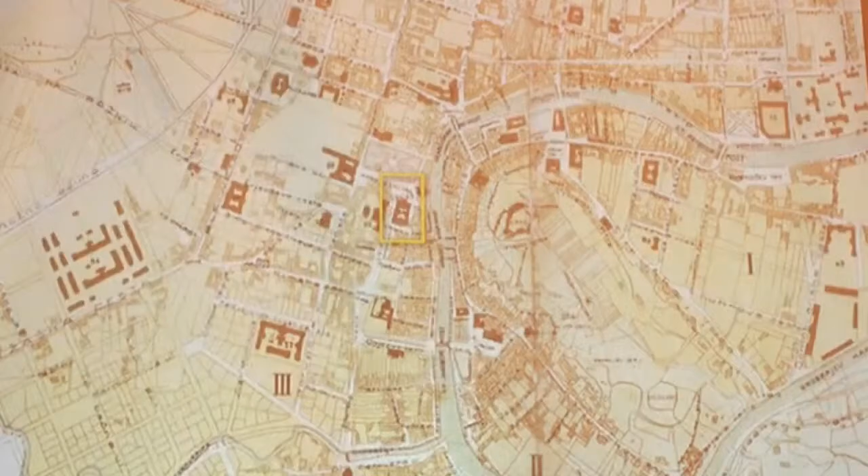A little bit of history before we start. I'd like to present the site where this building was built and what was there before. Before this building was built, here stood the so-called Vicedom's Palace, also called the princely seat or castle, as the ruler stayed there when visiting Ljubljana.

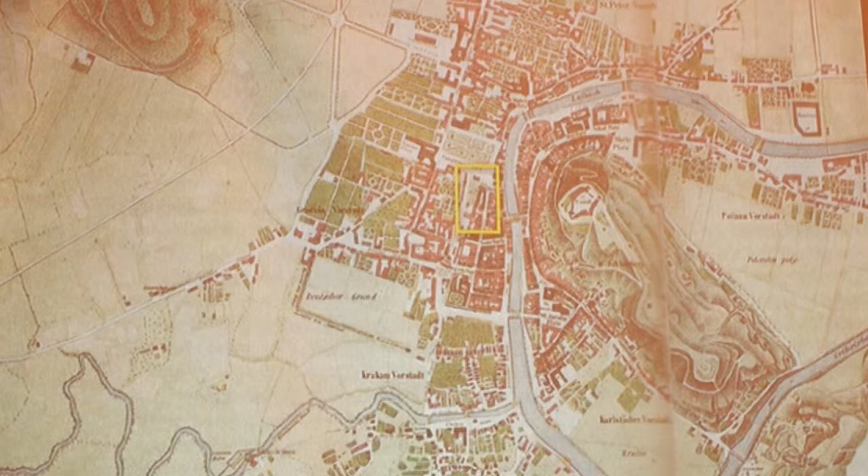In the past, this corner was protected by a fortified camp facing Congress Square, here. It was quite an important site, so fortified, that a lot of important residents and nobility were building their palaces and mansions here. This is also why this area is still named Square of the Princely Seat, and was mainly inhabited by the nobility.

In 1895, there was an earthquake in Ljubljana, so the Vicedom's Palace was demolished, and this building in which we are today was built between 1899 and 1902 by architect Hráský and later Josip Hudec. You can see the plan of the building on this map.

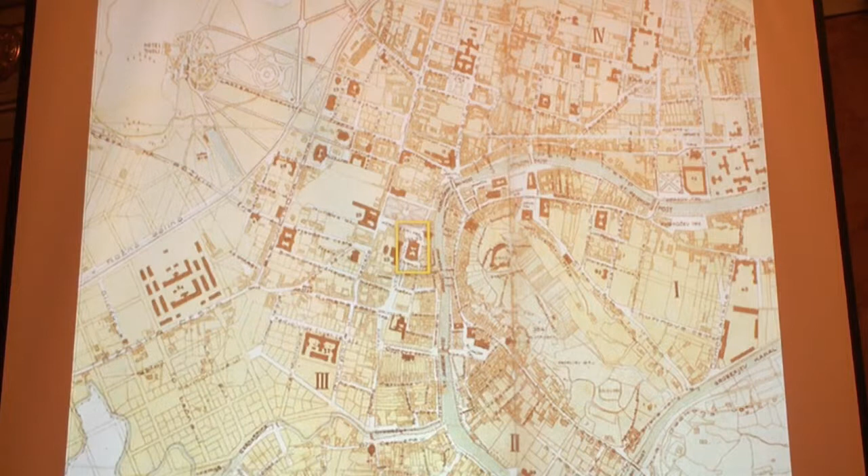The new Vice Lord's Mansion was built in a German Renaissance style, and its architecture is emphasized by little columns and adorned with the coats of arms of 14 Carniolan towns. At the center of the front, there is also the coat of arms of the province of Carniola, held up with two children. I don't know how much you can see that.

The building became the Slovene alma mater when the university was established in 1919. Before the Second World War, the university also achieved complete independence. On the green plot in front of the building, you can still see today a bronze herm of its first rector, mathematician Josip Plemelj, to celebrate 50 years of the university.

At first, the university building housed the lecture rooms of some of the faculties, predominantly law and arts. Later on, only the law school with its institutes. And in the building, there is the seat of the rector's office and the university administration.

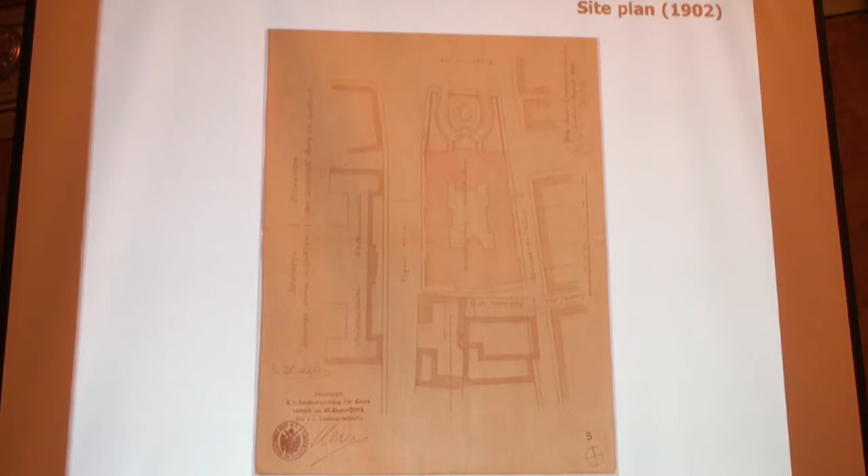This is the original plan. The building is situated on the extension of the building set along Vegova and Gosposka Street, and in transition to the Congress Square. On the second and third floor of the back wing is the festival hall, in which the Carniolan Provincial Assembly assembled until 1918.

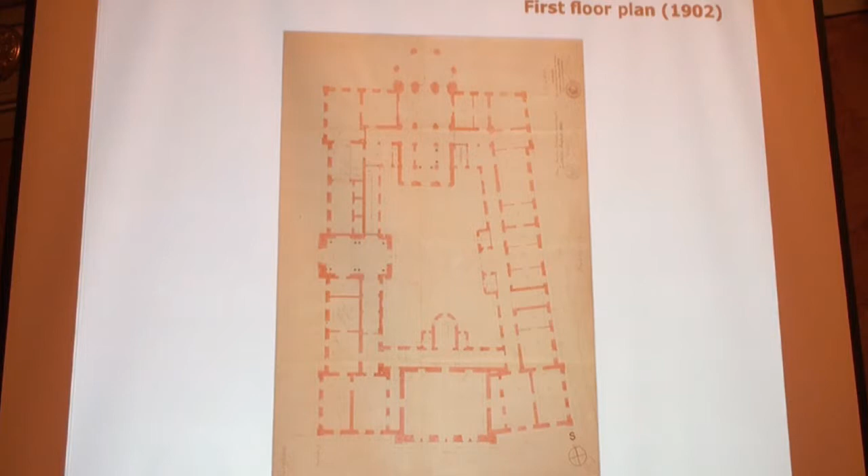The cross-section of the building shows a several-floor building with basement and attic, as well as a spacious inner court. The whole building and its individual parts are protected as a cultural monument of exceptional value. Among the most important heritage values are its spatial position in the urban part of the city, which I explained, and also the architectural value of the interior and exterior.

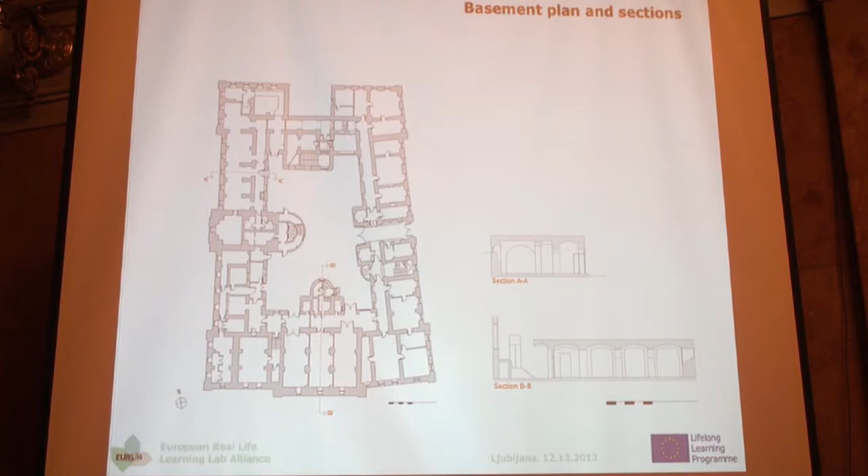So I would ask Tadej now to show his work. I will show you a quick look at the building. The building has 5 functional floors from basement to attic, each approximately 2,100 square meters. Now here is the first floor.

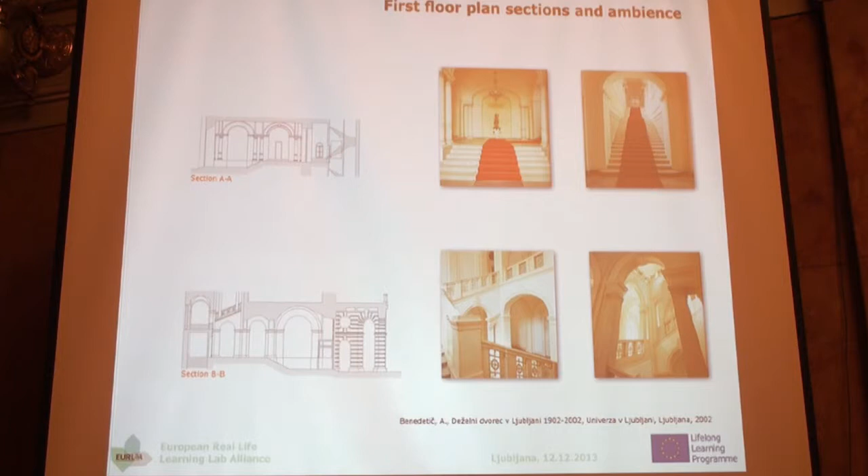Here are the main, the most prominent rooms on the first floor: the ceremonial entrance and staircase, and the main staircase on the first floor. Then we have the second floor plan.

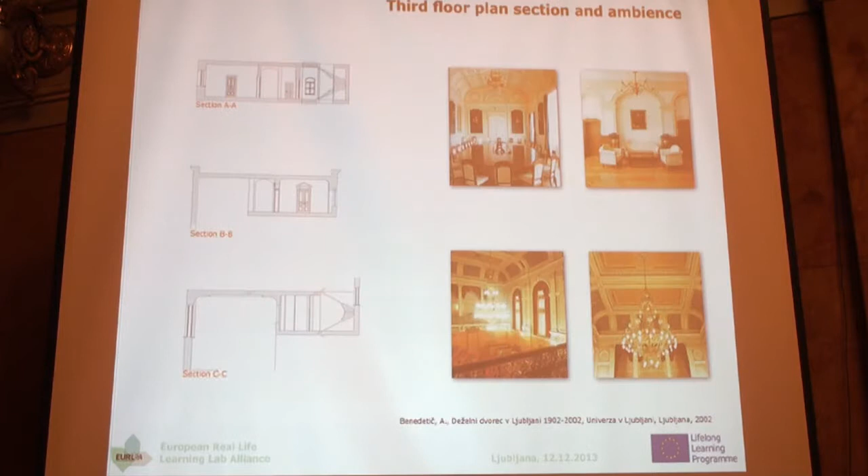Third floor plan. And attic. This was the quick look through plans.

Now the program of the building: in the basement there are rooms such as storage, installations, and archive, found in the first floor. The main and ceremonial staircase represent the most important interior, as I mentioned. The main staircase connects all floors of the building except the attic, while the ceremonial staircase is used only for special occasions and only connects ceremonial halls with the ceremonial entrance.

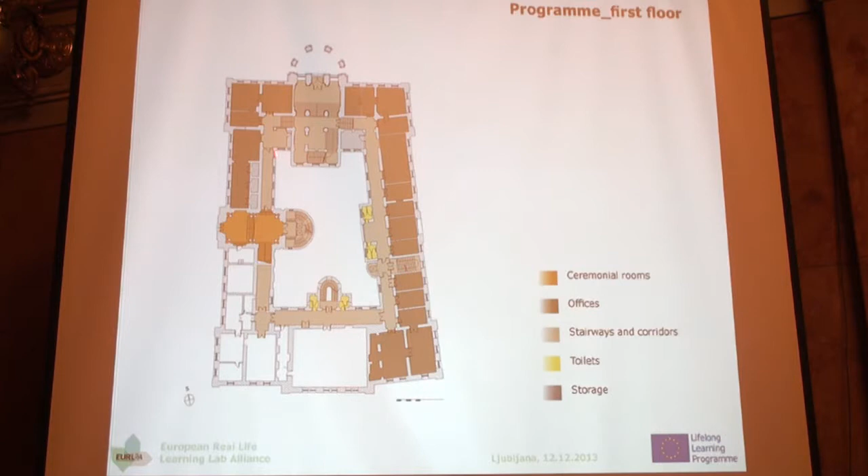So in the plan, here are the ceremonial entrance and stairs, and here is the main stairs. Then the second floor, called Piano Nobile, is the most prominent floor in terms of the program and the building decorations.

There are protocol areas for ceremonial events, the rector's room, and office rooms. It has to be mentioned that the assembly hall, where we are now, is, in addition to the staircase and lobby, the only room extending through two floors.

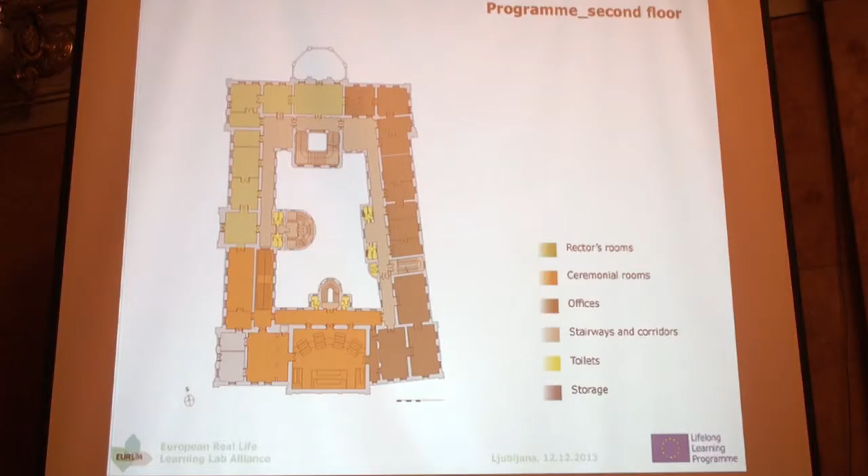Access to the attic was built subsequently - the tower in the atrium. This is a new part of the building. The entire area is not in use yet, only the part where the IRI Institute is, the part above the ceremonial entrance, and two rooms on the east side.

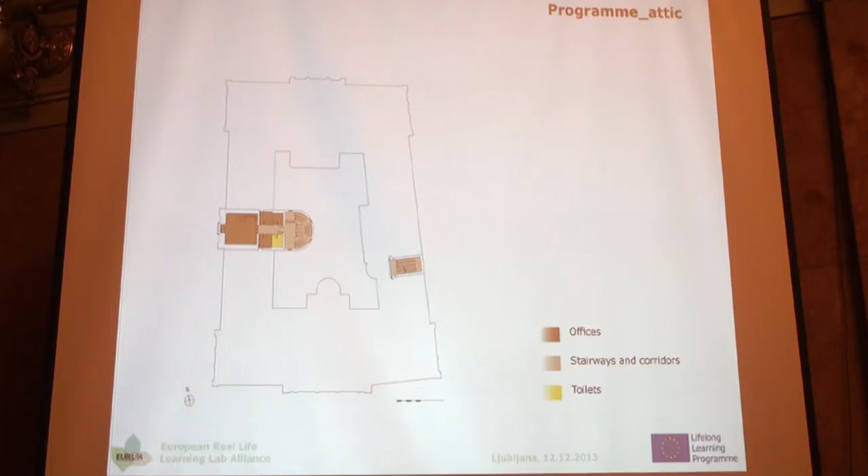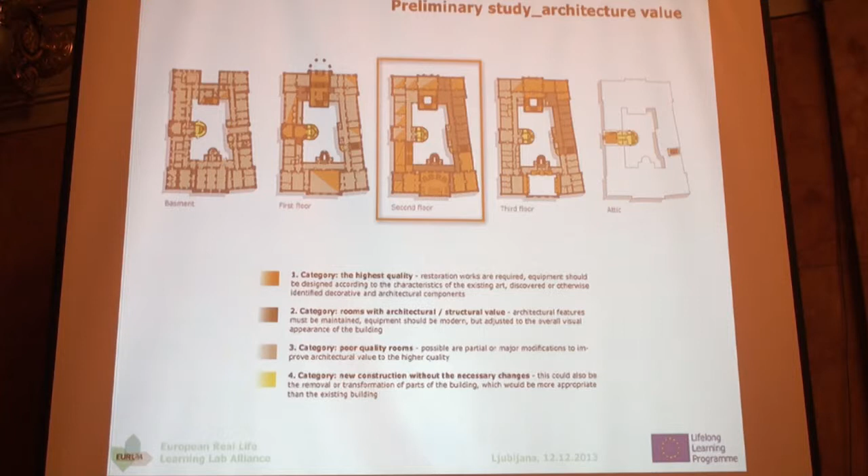During the preparation of the renovation plans around year 2000, a preliminary study of the building's architectural values before the renovation was done. Rooms were sorted into four categories of architectural value. The first category is the highest quality. Here is one closer example.

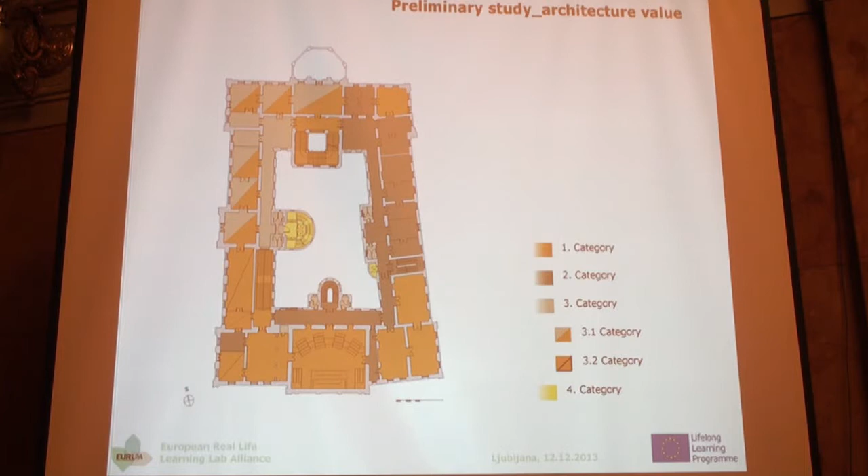The second category are rooms with architectural and structural value. The third category are poor quality rooms. There were some cases to modify rooms that were partly in the first category and partly in the third category, and the fourth category are new constructions without any necessary changes.

The rooms were recorded and categorized by a small graphic image and short description defining the area, size, purpose, elevation, and damage in each room of this building.

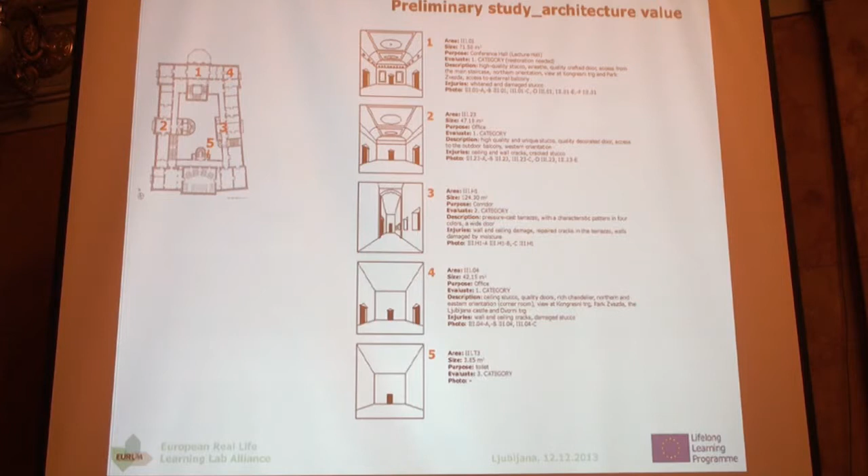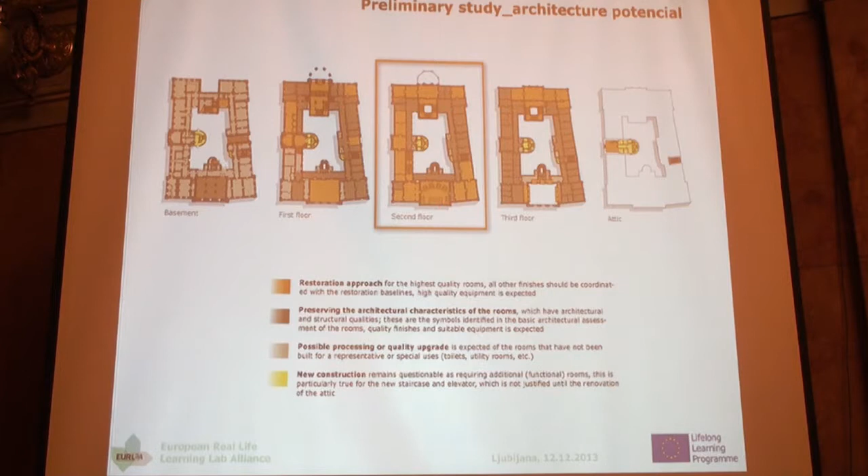Then the study of architectural potential was also sorted into categories, considering the quality which has to be reached after the renovation. Here is one shorter, closer look at this diagram. It shows how every floor should be refurbished.

Here are the same four categories as before: restoration approach for the highest quality rooms, then preserving the architectural characteristics of the room, possible processing or quality upgrade, and new construction. This study was made before the renovation.

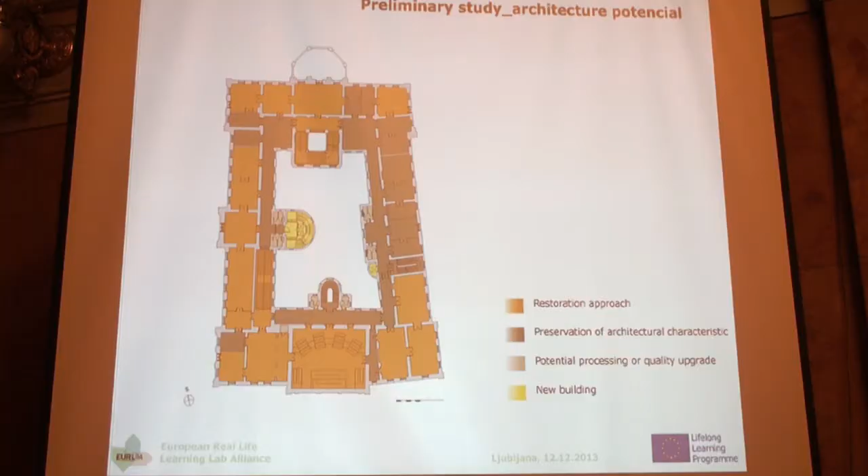So here I want to say something about the location. As mentioned, the building is located in the heart of the city.

The building is not part of a row of houses or a building island, but it stands on its own. What you see here are houses in a row. This building has streets, a park, and garden around it, so we can walk around it. That means all four facades of the building are equally decorated, though with different types of focuses.

The entrance area at the north side of the building represents a really important front of the Congress Square. This part. It is the only building facing the square whose construction line is moved back from the peripheral line of the square. All the other buildings here are built on this line, and only the rector's building is moved a little bit back.

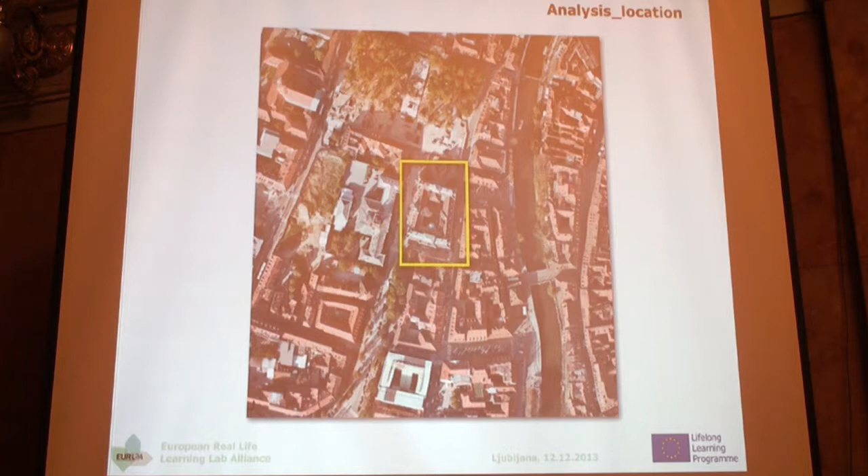The building has three types of entrances. The main entrance on the northern side is for visitors and employees. The entrance to the ceremonial room is located at the western side here of the building. The eastern access is also arranged for vehicles from the east side.

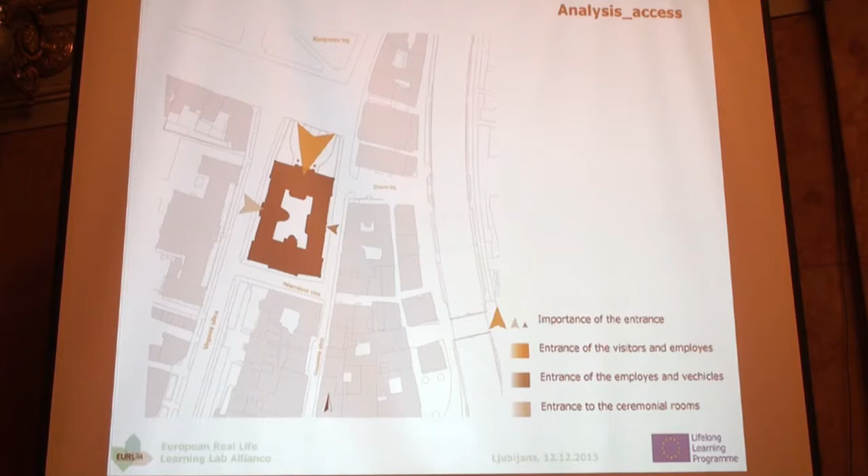The building volumes have different importance. The most prominent part of the building is the main entrance volume at the northern side and the part of the west facade. So this is the northern part, and this one is for ceremonial - it's like a tower on the west facade.

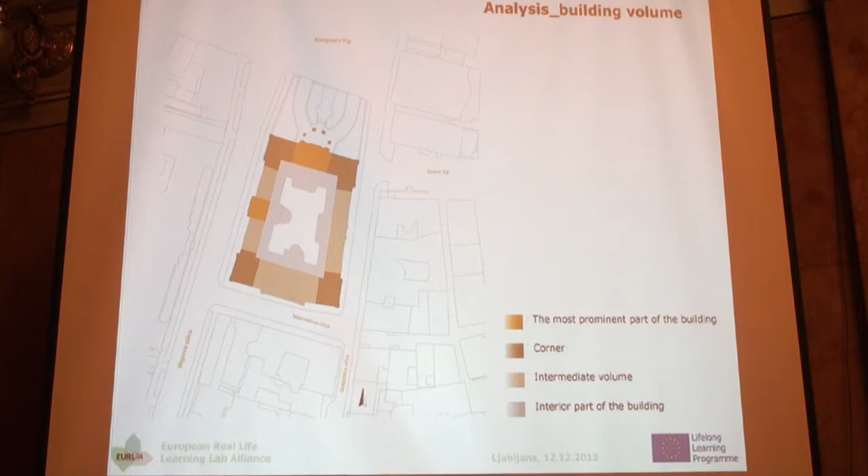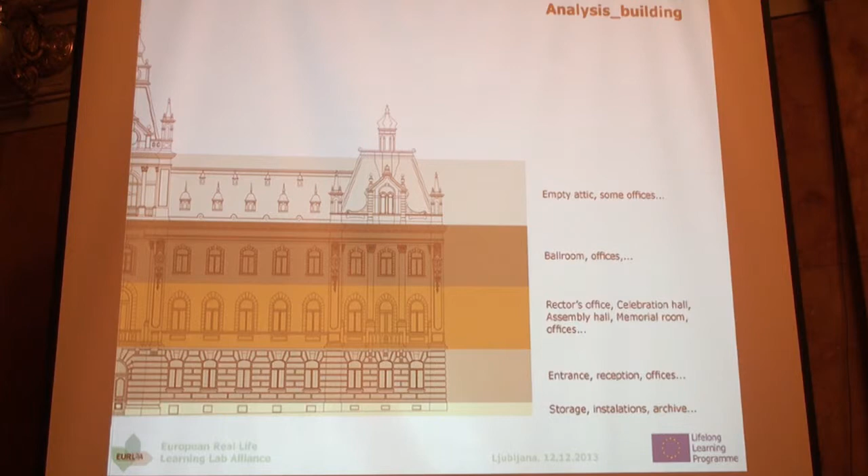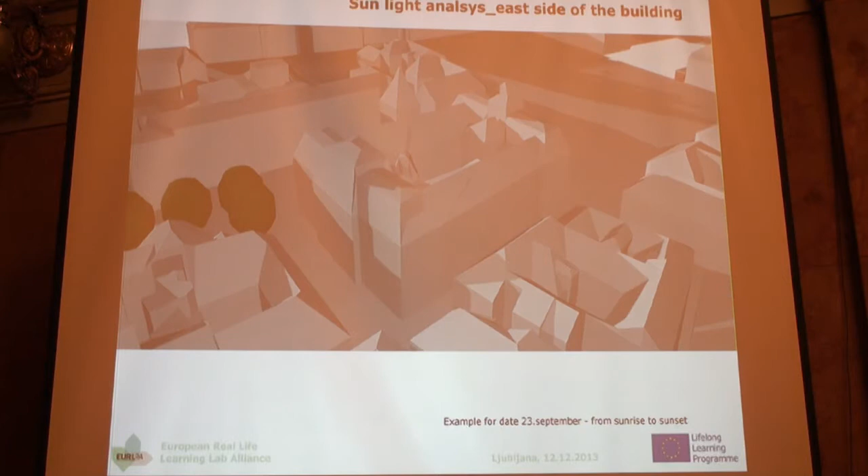The rooms in the building are arranged considering the importance of their functions, which can be observed also on the facades of the building. Here we make some sun study.

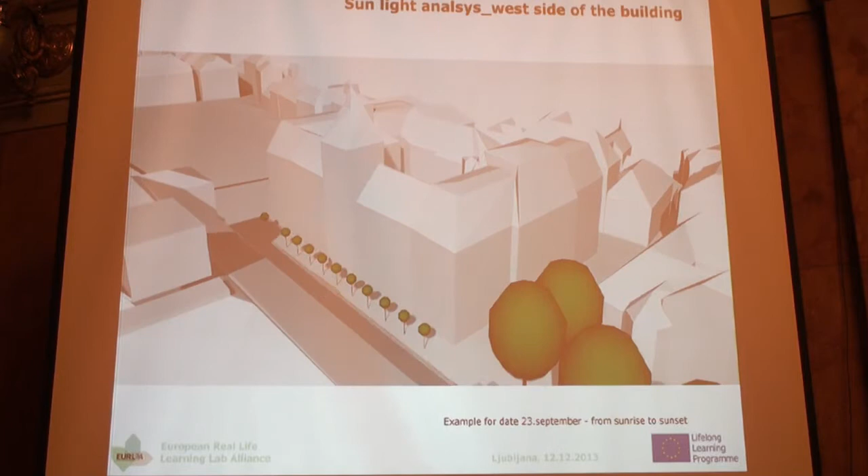This is just a graphic showing it. Later we will make a mathematical tool. So the external appearance of the building is connected with internal function.

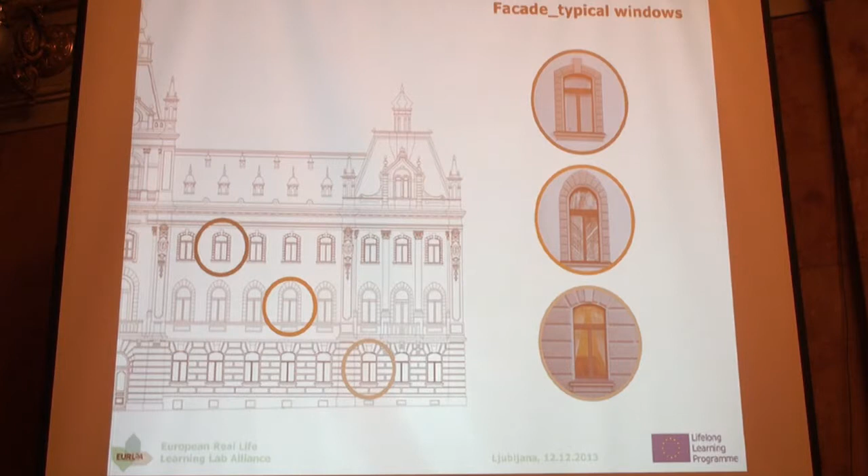Energy losses are high at windows and doors. There are 340 different windows, all of different types. Here are shown only the most typical ones on each floor.

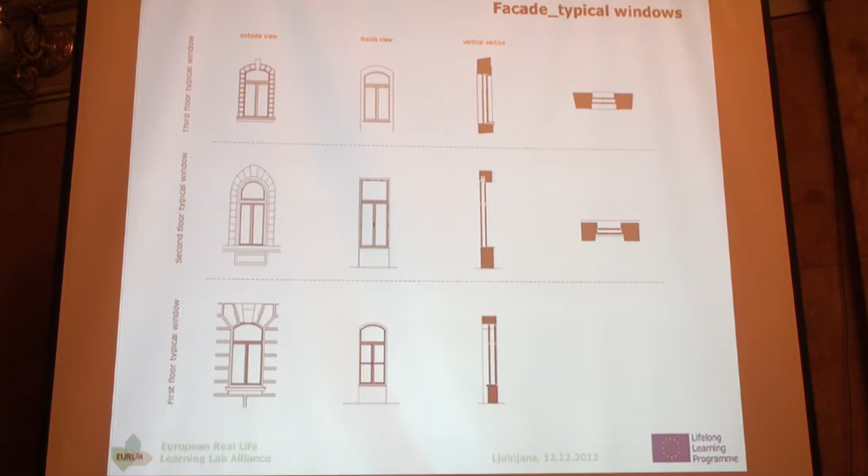So we have defined some problems which need to be faced if respecting the conditions of the Institute of Cultural Heritage and the energy refurbishment for the building. Existing windows are old and energy consuming. Those are box windows with single glazing. Then diverse forms of windows exist, as each floor has a different segment of the building.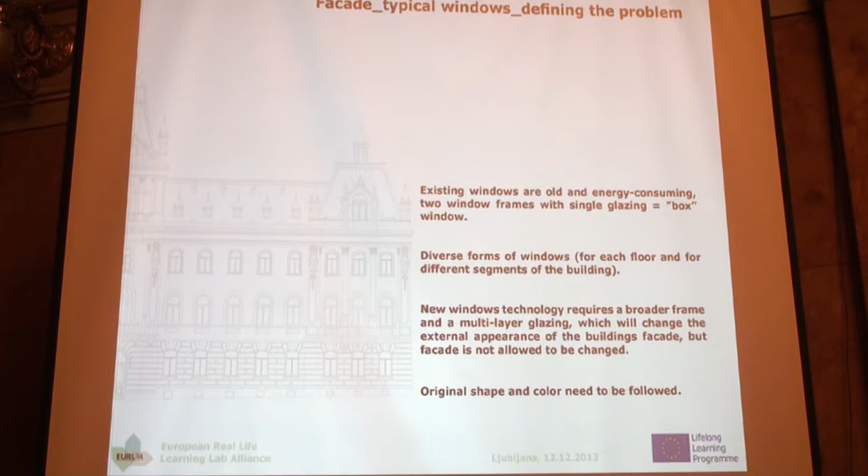The windows technology requires a broader frame and multi-layer glazing, which will change the external appearance of the building facade, but the facade is not allowed to be changed, and the original shape and colors of the windows and the building need to be followed.

I am Ale Sugosek. I'm coming from a company, Sora. We are a producer of wood and wood aluminium windows, and I guess I have quite a hard task now.

Because you're just after lunch, the temperature is just fine, the level of oxygen here is decreasing, and also the caffeine is not yet in your veins, but anyway, I will try to be as enthusiastic as possible.

So here we are in this Knowledge Alliance project, where we communicate and cooperate with a scientific institution, the Faculty of Architecture, and we are a kind of reality check. We try to give our best knowledge from industry, some of our former experiences, and also our knowledge from the field of thermal efficiency, and we try to mix this with theoretical background from the Faculty of Architecture together to get the best solution for this great building you are in today.

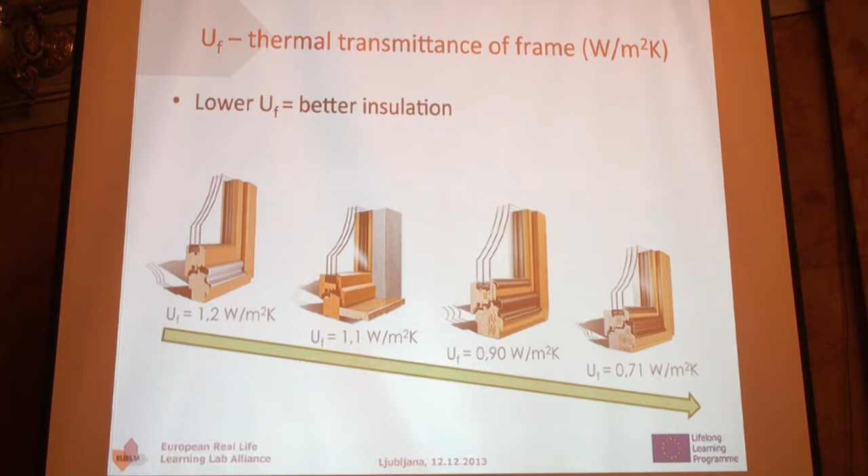Just quickly, a brief introduction about the windows. What is really important about the windows? The first thing is the thermal transmittance of the frame. As you can see here, this is the frame. So how much heat passes through the frame?

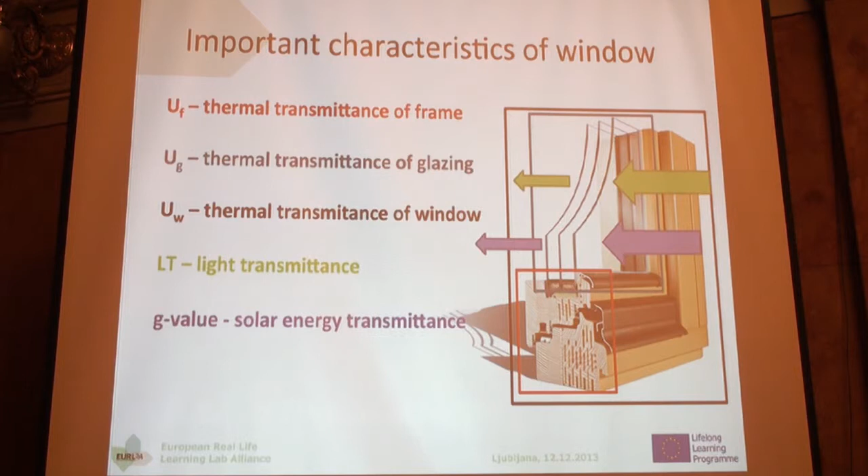The second one is the thermal transmittance of glazing - how much heat passes through the glass. The third thing is light transmittance of the glazing, or how much visible light passes through it. And the fourth thing is the so-called G value - how much solar energy passes through the glazing. These are the most important characteristics that we need to consider for this building.

So the lower the UF, or thermal transmittance of frame, is, the better insulation you have. And this is very important because you need to get close to some specific demands.

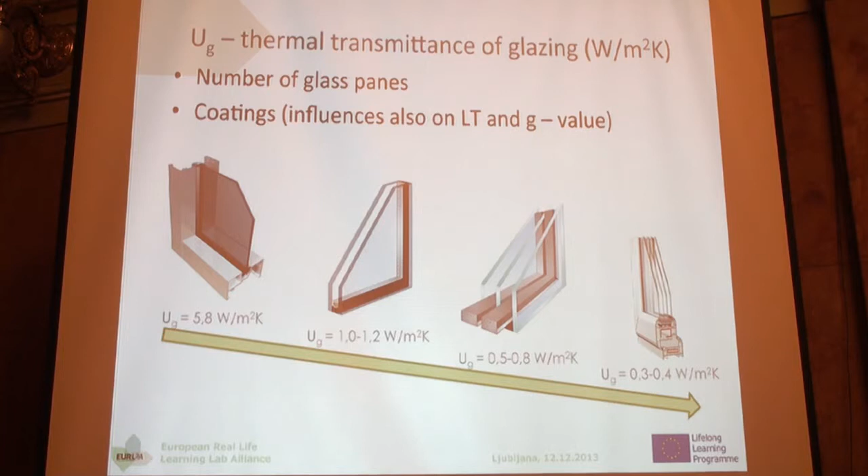Then further on we have thermal transmittance of glazing. We have double glazing, triple glazing, so the number of glass panes is very important. On this building, at this time, we have single glazing, as you can see here, and this is not really okay. Double glazing is getting more and more out of the industry, while triple glazing is getting more and more popular. The 4-pane glazing is not really okay because it is too heavy, and your windows and frame cannot gain such heavy glazing.

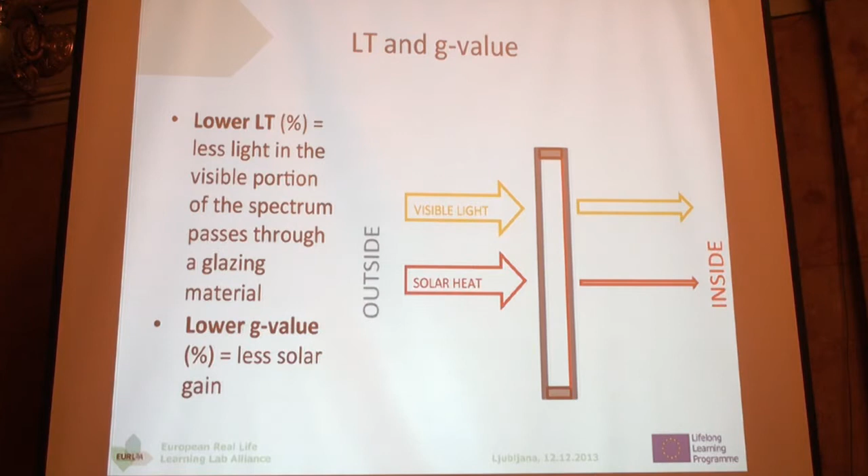And then we have light transmittance and the G value. The lower the light transmittance is, expressed as a percentage, the less visible light passes through the window, and it's quite the same with the G value - the lower that value is, the less solar energy passes through the window.

What do we have now on this building? Mostly we have so-called box windows - these have two casements, both of which can be opened, with single glazing. So the U-value, which is the combination of thermal transmittance of frame and glazing, for the entire window is around 3.5. This is a very high value, so these are not good windows.

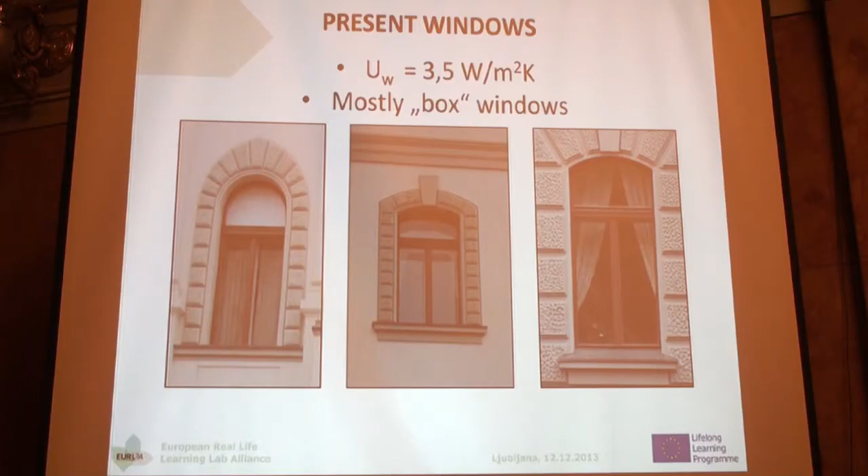And these here are demands. So from 3.5, we need to get as much as 1 watt per square meter Kelvin. And the second demand is the protection of cultural heritage. So the visual appearance must be quite the same, materials, and so on.

Based on these demands, we have some proposals from industry, what can be done, and the first proposal is, well, quite simple: a wooden window with triple glazing. Why triple glazing? Because with double glazing, you cannot reach the demand of that value 1.0. So you need triple glazing, and here the light transmittance of such glazing is around 70%, and the G value around 50%.

The second solution is box window. This will be in the case if the people from the Cultural Heritage Center say, no, box windows must stay the same, so we will do box windows. But we propose box windows with twice double glazing. And at the end, we have good thermal characteristics of the window. So these are two proposals.

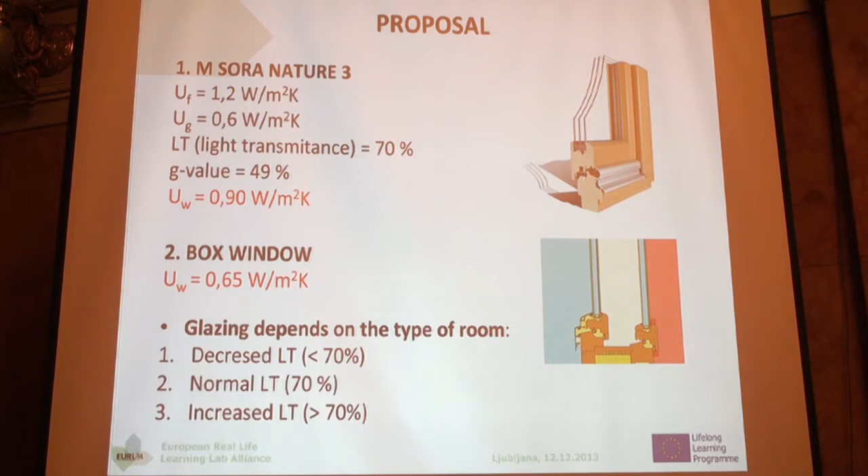But here we can have some problems with light transmittance. The more glass panes you have, the less visible light passes through. So if we want more light to pass through the window, we will need to change some coating on the glass. So we will increase light transmittance. So this is the solution.

This is another possible limitation. So as I already said, light transmittance is of importance. And the second one, there are many glass pane dividing crossbars. Are you familiar with what crossbars are in windows? So those crosses. Normally those crosses divide big glazing into smaller parts. So when you divide it, you get a worse U-value, so lower insulation.

So we have a very simple solution. We can install glued-on crossbars. So it looks the same, you just glue it on, and you have the same thermal transmittance.

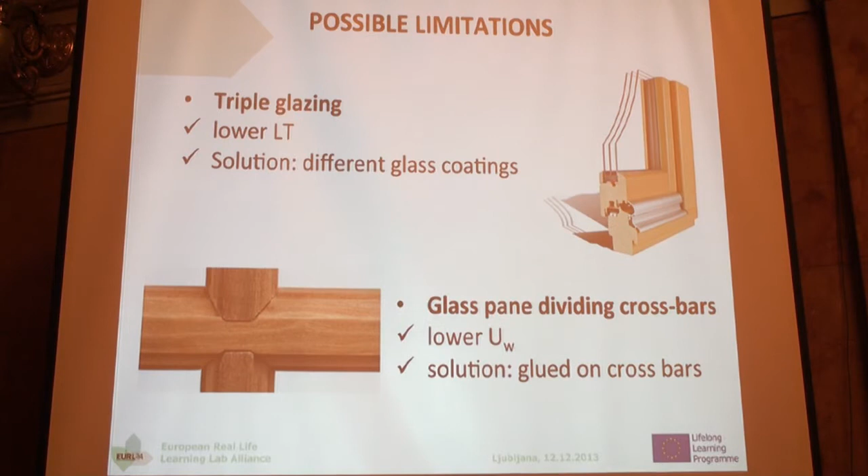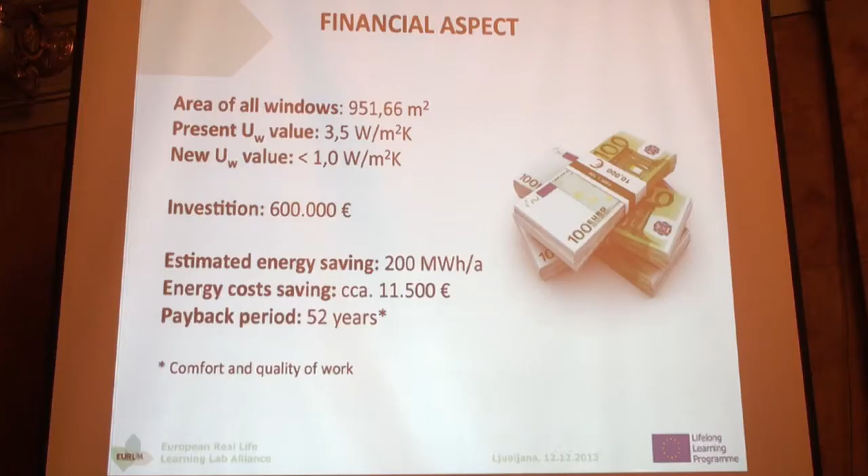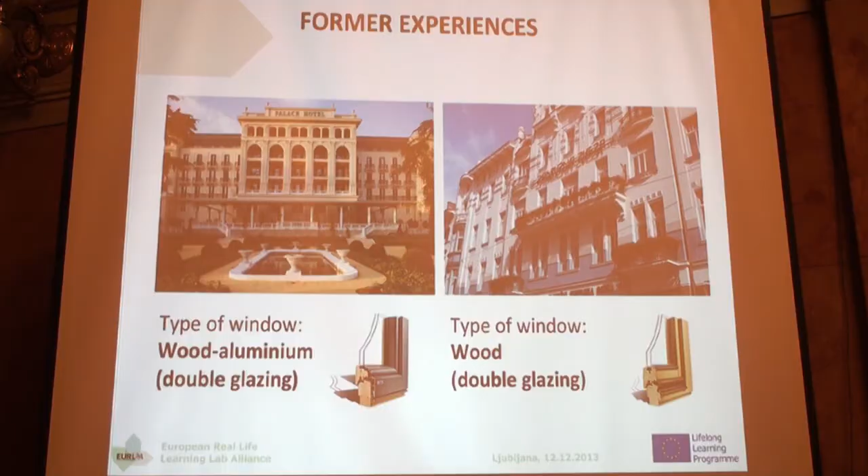And here is also one big building very near here. So if you go to Prešeren Square and then go to the left, you will see that building. And there are also windows that were restored, also with double glazing. So these are two of our former experiences. There are more.

And, well, this is just the beginning of the project. We will work a lot on it in the next months and years, and I believe that we will do a good restoration on this building and make it perfect.